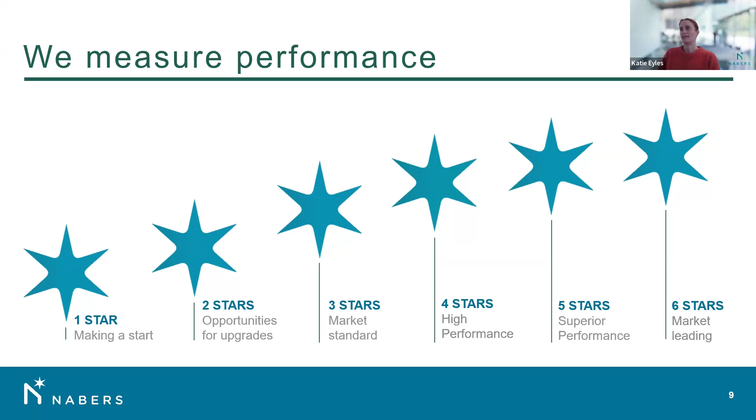So we measure environmental performance for operational things like operational energy use, water, waste, indoor environment, so things like air quality and noise and all that kind of stuff. And yeah, of course, now embodied carbon as well.

And the reason why we do that on a star rating scale is so that we can enable fair comparison. So when we place buildings on a star rating scale based on their performance, we're taking things into account in terms of what the floor area is, what the function of a building is. For embodied carbon, the height of a building, for example, is one of the things that we correct for, to make sure that if you're doing a rating, giving us your data, and then getting a star rating result, you're comparing apples to apples.

So for example, if we collect data for a 5-story office building in the Melbourne CBD that's built on a swamp, or a 20-story office building in Sydney that's built on sandstone, we're correcting for things and providing a star rating scale that lets you understand how that building is going compared to what we would expect for a building of that size, shape and purpose.

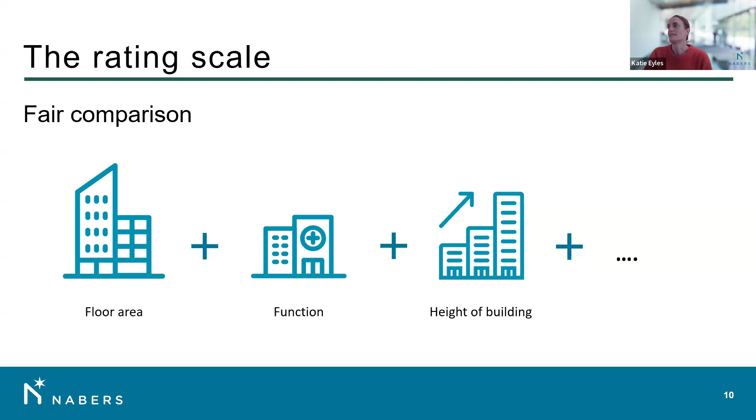Next slide, please. So yeah, we certify buildings on all of these things. Embodied carbon is the most recent addition.

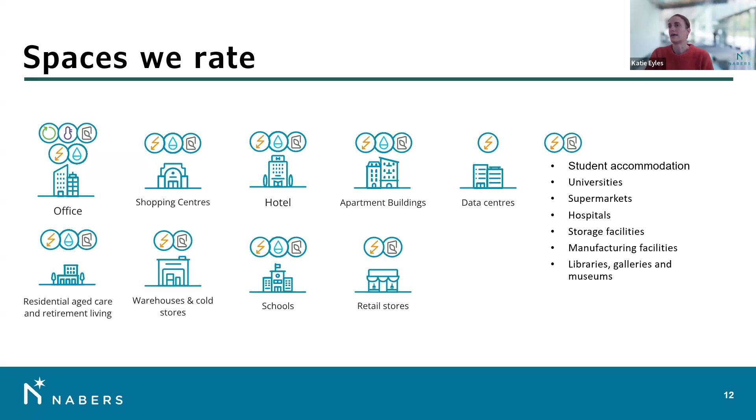Next slide. And we rate a variety of spaces. All of these we will be rating for embodied carbon apart from data centres. But yeah, we work in a wide variety of buildings.

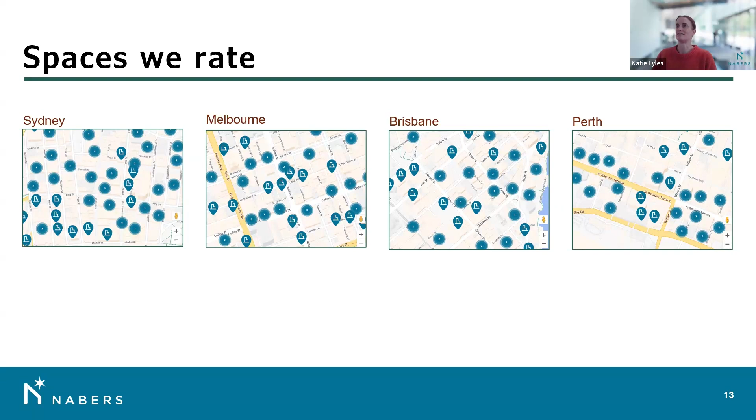And you can see we have a lot of rated buildings. These are just some examples from our website of buildings that are rated around Sydney, Melbourne, Brisbane and Perth. We have a lot of ratings because we've been around for over 25 years, and office energy ratings, for example, are mandated by the federal government. If you want to sell or lease a space that's over 1,000 square metres, you have to have an operational energy rating in place. So yeah, I have a lot of experience rating buildings, have been doing it for decades, and have a lot of buildings rated around Australia.

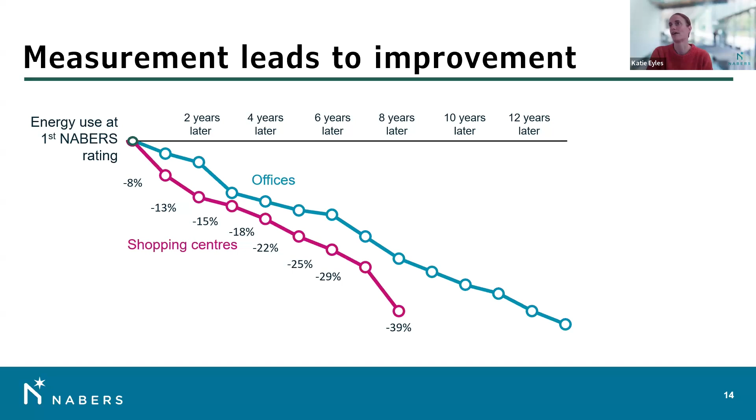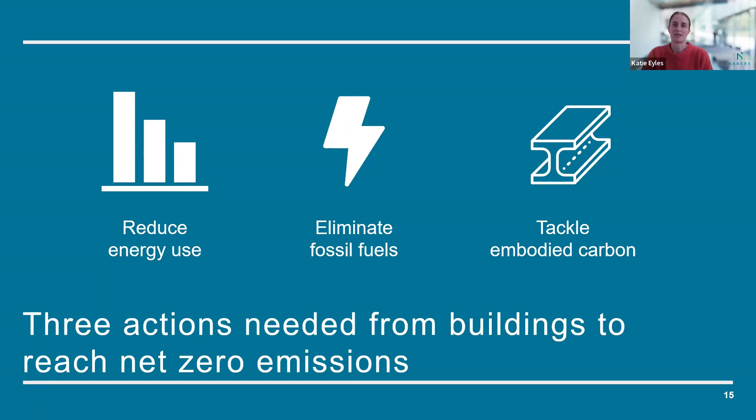So it's very clear that someone needed to be doing something about putting together a method for measuring embodied carbon in buildings. And that's where NABERS came in.

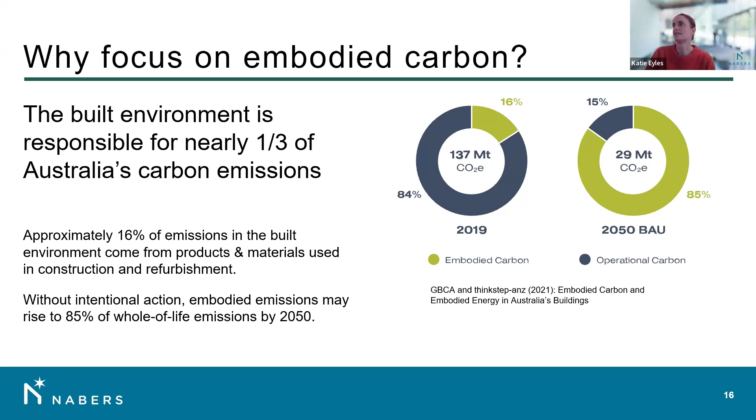So next slide, thanks. So yeah, we started figuring out what to do about this in 2021. And the way we went about it was pretty much just to speak to everyone involved in the process of building a building, from developers to architects and engineers, policymakers, and then, you know, product manufacturers, of course, as well. We spent a couple of years doing a lot of industry consultation with ThinkStep as well, helping us with that, to figure out, okay, if we want to measure embodied carbon in a building, how do we do that?

You know, how much of the building are we measuring? Are we trying to measure everything down to all the nuts and bolts, or do we just look at the main contributors to embodied carbon? Try to get 80 or 90% measured. What's most practical? What emission factors should we be using? All these kinds of questions we worked through with industry to figure out how to develop a rating tool. Next slide, thanks.

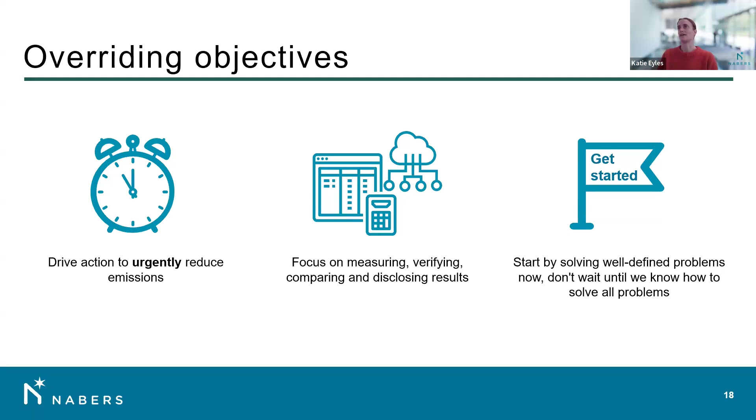Through that consultation process with industry, we landed on these overriding objectives for the tool. We need to drive action to urgently reduce emissions right away. We need to focus on being able to compare results between buildings, understand what's good and what's not so good, with everyone measuring consistently and verifying those measurements are accurate. The third objective is to get started by solving well-defined problems right now. A few years ago there were a lot of problems to solve in embodied carbon, with quite a few unknowns. But what we can do is start solving the well-defined things now, and have a roadmap for the things we aren't able to solve yet. So really, it's focused on urgent action.

We put that together with a lot of input from industry, and by mid-2024 we really had national agreement on the tool. It was developed in partnership with the GBCA and industry, and has been fully aligned with international standards for measuring embodied carbon in buildings. We worked closely with Infrastructure New South Wales and Infrastructure Australia to make sure we're all taking similar approaches, so no matter what project a team is working on, the theory behind how you measure embodied carbon is the same.

It's already in policy in a few places. The New South Wales Sustainable Building SEPP uses the NABERS methodology. There's a federal environmentally sustainable procurement policy for government assets, and it's also a voluntary pathway in the NCC 2025 update.

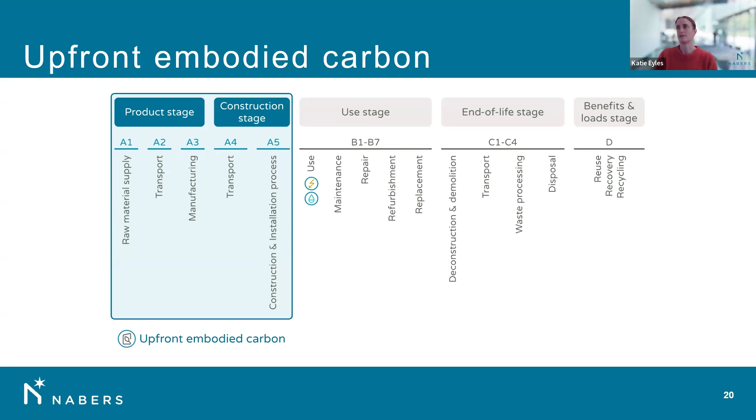So in terms of the tool itself, what are we looking at? The tool measures upfront embodied carbon, so everything from raw material supply through to the end of the construction and installation process.

The reason we focused on upfront embodied carbon is because we need urgent action on the emissions taking place now, and we know upfront embodied carbon is the biggest part of the picture. A report recently published by ASBEC showed that around 65 to 75% of all embodied carbon in a building is upfront embodied carbon. Of course looking at whole of life is important, but if we were to look at whole of life carbon now, we'd be making assumptions about the future which may or may not end up happening. So for now, with the NABERS tool, we wanted to stay focused on the biggest part of the picture, urgently reduce emissions happening now, and avoid trading off emissions now for things that may or may not happen in the future.

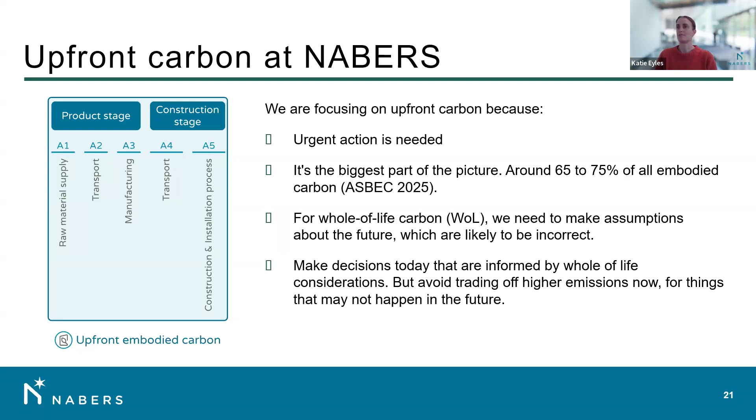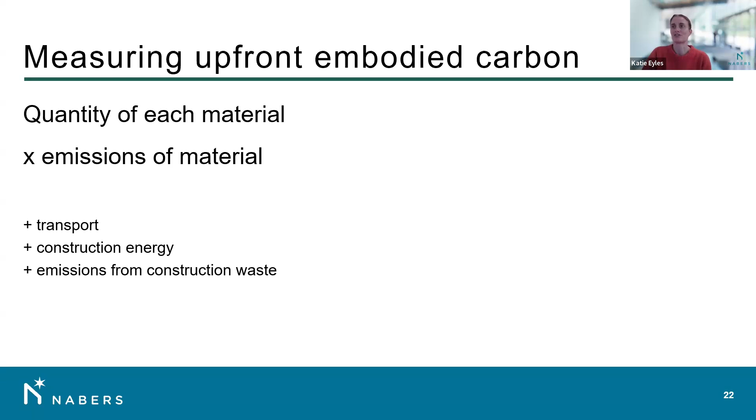In terms of how we measure, it's pretty simple in a way. Obviously there's a lot of detail to this, but essentially we're looking at the quantity of each material, and the emissions of each of those materials, then adding on transport emissions, the energy used on the construction site, and emissions from construction waste.

If we're talking about what materials we're measuring, what are we actually talking about? We're talking about the main contributors to embodied carbon in the building, so substructure, superstructure, envelope, the bigger internal items, and building services and vertical transport. We haven't included things like fixtures and fittings and other things that make a smaller impact, because we really need the tool to be practical.

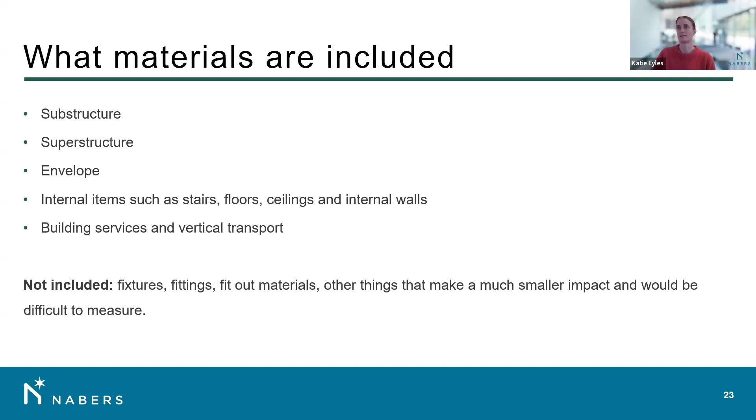By including what we have included, life cycle analysis of quite a few pilot buildings and sample buildings earlier in the process showed us that once we include all this, we're measuring about 90% of the upfront embodied carbon, and these are the materials more likely to have measured emissions. There's more data around for them. Once you get into the smaller bits and pieces, you're just spending a lot more time measuring, and there might not be good data for those things. So we landed on looking at about 90% and focusing on the main materials.

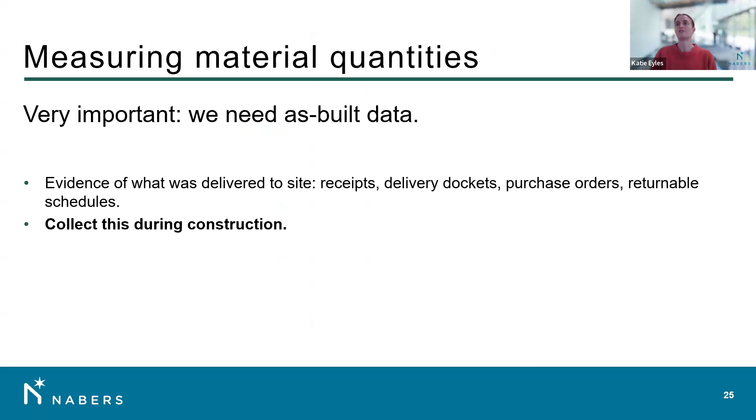In terms of measuring material quantities, what's really important is having as-built data, evidence of what was delivered to site. Nicole will talk a bit more about this later, but we're really talking receipts, delivery dockets, purchase orders, returnable schedules, and it's really important to collect that during the construction process.

And so then we know how to measure what materials we're measuring in terms of the emissions. We heard really strong industry preference for process-based product-specific data, which Nicole will talk more about. So the options are EPD, another approved independently verified source of process LCA data, so a carbon footprint that's equivalent in system boundary to an EPD or Climate Active, or if you don't have one of those things, then the NABERS default emission factors.

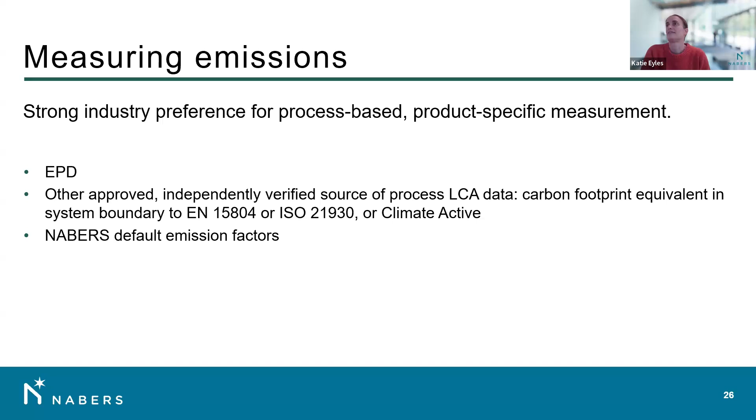So we created a database of NABERS default emission factors because there wasn't another source available in Australia for process-based, up-to-date information for all of the products that we need to have an emission factor for to do a NABERS rating. We created the defaults for everyone to use, which are published publicly and available for everyone now. We created those by collecting all of the data that was available to us, so all of the EPDs for products available in Australia and all other process-based LCA sources that were appropriate, and defined material groups, for example, the different strengths of concrete in situ.

And then we had workshops with industry groups, so all of the manufacturers, LCA folks, and sustainability consultants, all the people that might want to input into how we went about this, had industry workshops with them to make sure we'd collected all the data that was available, and to make sure we had grouped them in appropriate groupings of things that are used in a similar way or manufactured in a similar way, or where the emissions were comparable.

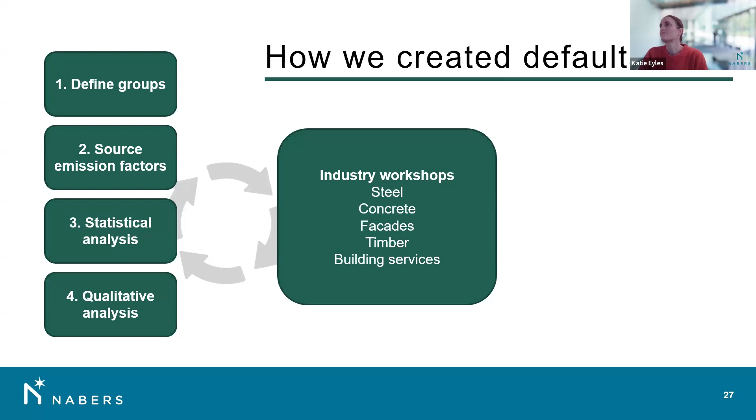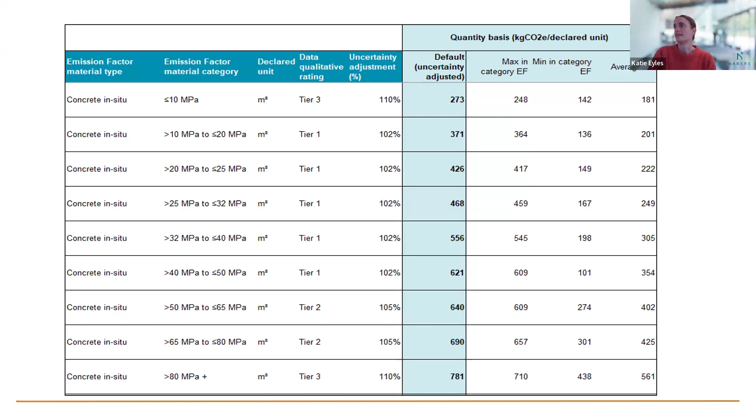Last thing I wanted to mention: we do get the odd question about how do you know that what people are telling you is correct. People could say, oh, I've got this EPD for this concrete product that was used. We check, ratings are audited, so you need that as-built evidence if you're saying you've used a specific product and you're giving us an EPD for it instead of using that conservative default emission factor.

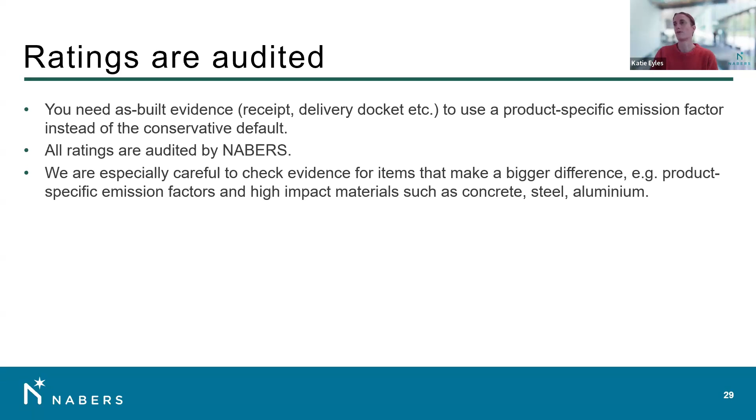NABERS audits all ratings, and when we audit, we are especially careful to check the evidence for items that make a bigger difference. So, for example, if you've used a product-specific emission factor, especially for a high-impact material such as steel or aluminium, we do check that you have given us the delivery dockets, and we check that the EPD is the correct one for that product and that the evidence all lines up.

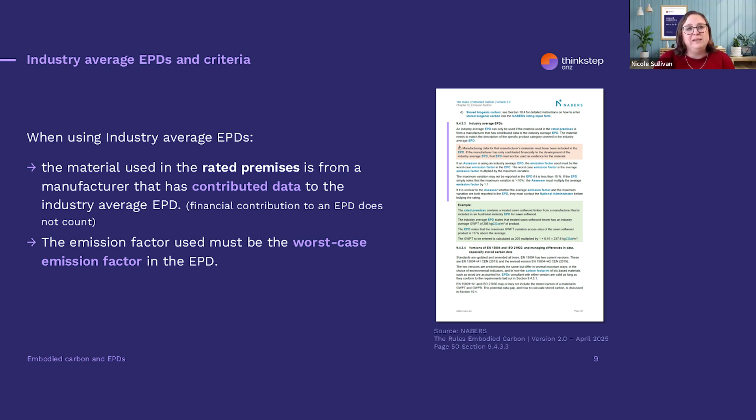When you have an industry average EPD, the emission factor used by NABERS is the worst case emission factor in the EPD. So you take the carbon footprint as declared in the EPD, and every industry average EPD will report a variance on the carbon footprint. If the maximum result was 10% more than the average, then you would need to claim that 110% of the average number.